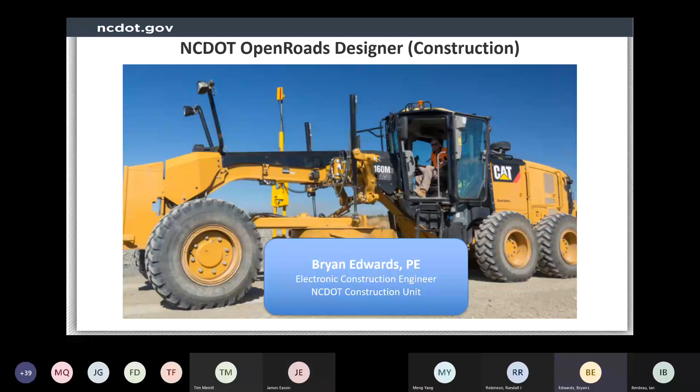Being new to construction, I definitely still feel like I have a lot to learn about construction. But obviously, as we're talking about ORD and how that's going to impact construction, there's definitely a lot... I guess there's a lot of potential. Let me get my slides to advance here. There's a lot of potential.

To be honest with you, I feel like there's probably more questions than answers at this point in the game. I'm thinking back to my time with CAD, and even up till now, we've been talking about ORD and wrestling with it for years on the design side. I don't know if it's going to be all that long on construction, but it's definitely going to be a long process. I don't think we know all the answers, or I know we don't know all the answers yet. I think it's just going to take time for a lot of these answers to present themselves more clearly as we move forward. But anyway, that's just a bit of a disclaimer before I jump in here.

We'll talk a little bit about what we do today, or at least how we deal with a 3D model today, just very briefly, and how we anticipate ORD changing this, and what tools we anticipate using. Obviously our field folks are not going to have CAD machines and be able to run OpenRoads Designer, so they're not. So what are they going to use? Well, they all have iPads. So is there going to be an app for them to use? We'll talk a little bit about that.

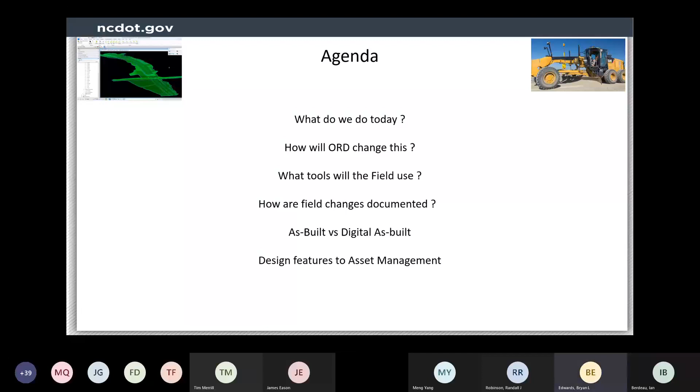So real quickly, what we do today - and I'm sure most everyone's familiar with this - we use the MicroStation tools or software. We produce a 2D set of plans, and we do produce some 3D TIN files that represent this grading model. We do that, at least for larger projects. But we don't certify that; it's just kind of an extra freebie that goes along and gets passed to construction.

And frankly, because it's not certified, the contractors don't use that specifically. They will build their own model from the files that are certified, the 2D files. So that gets passed over to construction - the 2D sets of plans and this design model.

That's really just TIN files, proposed TIN files. What's in construction is just PDF files that our folks are dealing with. We will mark up those PDFs at some point as the project gets built, to note any corrections, revisions, or changes to the plan. We'll mark that up in a PDF, typically using Bluebeam or maybe Adobe Pro, and that's basically it.

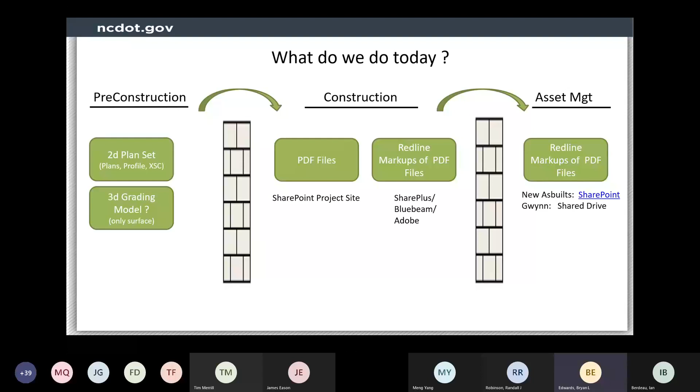Again, I mentioned that we provide these proposed TIN files today, but they're not certified, so it's up to the contractor. If they want to use AMG - automated machine guidance - they're going to build the model themselves from the 2D certified plans, and they're welcome to do that. We have a spec that controls how they can build based upon their model. They have to submit this model to us, to construction, and then we vet or verify it.

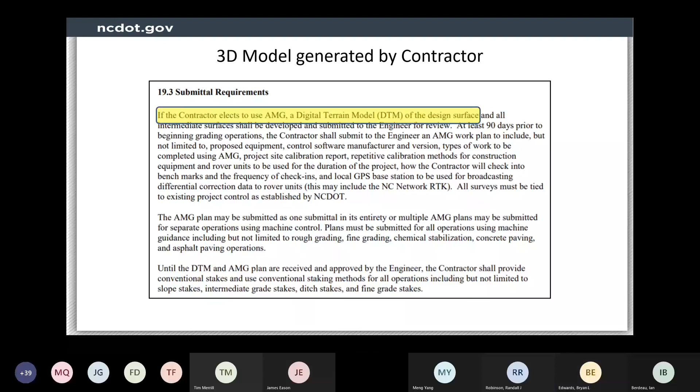Next slide. So, verifying the model - how do we know? Again, we have the design, which is mostly 2D with some 3D, and then we have this contractor model, which is 3D. How do we know that it's right, that it matches perfectly or reasonably perfectly with the design intent? That's what we have to determine.

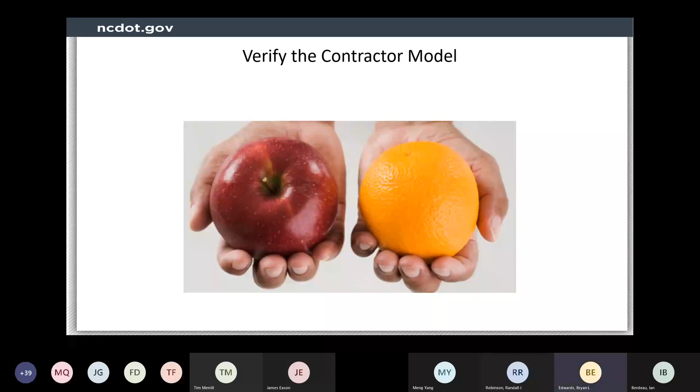In the process we have - I think this was developed by Location several years back - basically what we have to do is start with our design model and bring that forward into this tool called Trimble Business Center. Trimble Business Center is a Trimble tool that has some good ways to compare surfaces, and that's really the main thing we're doing with this.

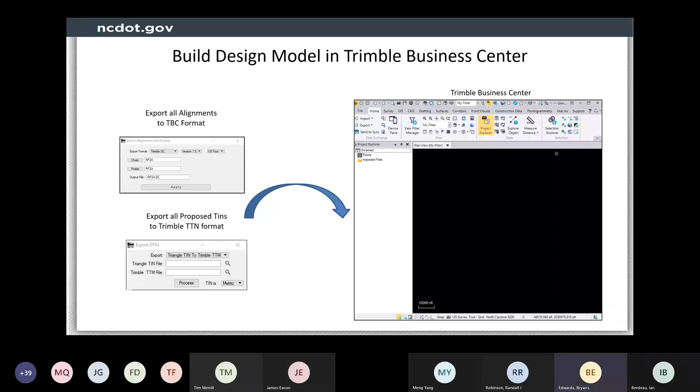We're bringing the alignments in, we're bringing the TIN files in over into Trimble Business Center, and ultimately we end up with this model. This is a relatively quick process because it's all built already - we just have to convert it over into the Trimble format.

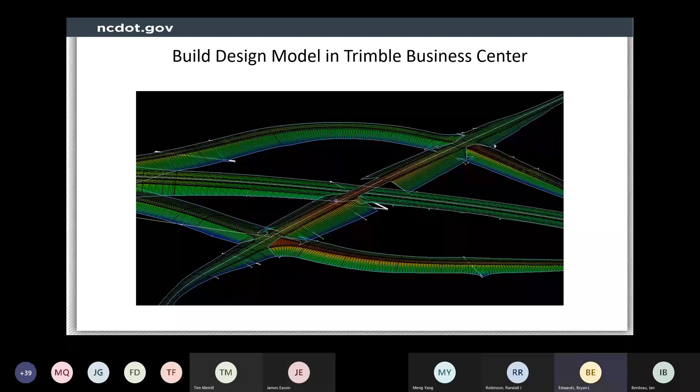So what's shown here basically represents the design model, and then what we would do would bring in the contractor model. So now we have both models in the same software, and we can compare the different surfaces. This just kind of represents what I just described - we've got two models, two surfaces in here.

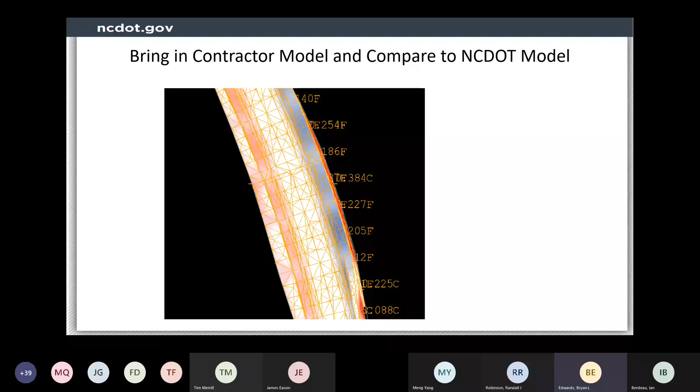Trimble has some really neat tools where we can just evaluate the surfaces. What I'm showing here is like a color shading map that compares the two surfaces - it will generate this color shading map, and we can set the parameters for the colors.

Anyway, we've got it set up so if anything that's white is a very, very close match, and we would say, hey, it matches perfectly. Anything that's blue or red would be higher or lower. One surface would be higher or lower. But this just illustrates the differences.

And then when we have that, we can begin to investigate and see, okay, why is the contractor model different in this area from the design? Is the design model wrong? So again, it just highlights areas where we need to focus, so that we can have some assurance that the contractor model is good or not good.

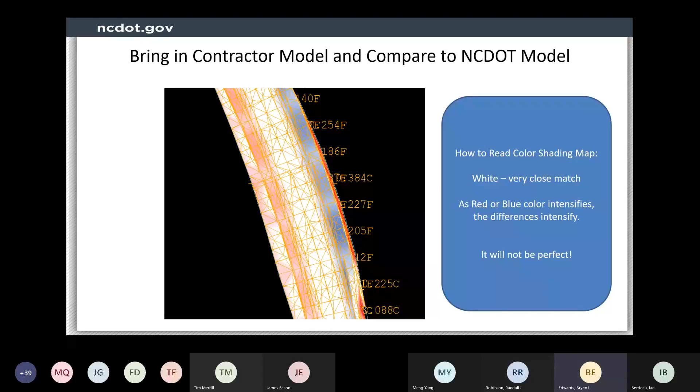I know that's kind of a subjective word there, but anyway, this process I think has worked pretty good, and we do know that it is not going to be a perfect match. There's just not, and that doesn't mean the contractor model is bad or wrong. Just means that these are areas we need to look at. Can we live with the differences?

And that's kind of the approach that we're taking. So anyway, that's what we'll do today. How is ORD going to change this? And this is, again, as we begin to look forward.

So as we talked a little bit about, the design model today is not really certified. So I mean, we provide it, but ultimately, with ORD, at some point, we anticipate that model is going to be something that we can stand behind as an organization and say, hey, this is good. We are certifying this as good, and you can build it according to this. And so we anticipate that happening.

I mean, again, I think there's a lot of questions as to how that works and how we're going to do that, how we're going to seal the model. I don't know how that's going to happen. I know a lot of other agencies have taken some approaches on this that maybe might work for our state. I suspect that the Board of Engineers is going to have to be involved with this conversation as we move forward.

So again, presuming that the model is certified, and the contractor builds from that model, that's at least the hope. My guess is that'll probably be a long transition period where they're still going to build their own model, until they begin to have confidence in our model.

Okay, and then the questions about how do we inspect based upon a model versus a 2D set of plans. So again, there's still questions that we have. We don't even know exactly. Well, I think we know the tool that we're going to be using, and I'll talk about that in just a second. But let's see what's next here.

I guess continuing this conversation, or continuing the thought here. I mean, when I say model, what does that mean? Okay, what file format is that? Is it a DGN file? Is it an iModel, which is again a term that if you've been around Bentley over the last couple of years, you probably have heard this term before. Is it an XML file?

I know in the past Bentley has had the MicroStation or Geopak has had the ability to generate an XML file of a surface, and that's something that could be delivered, a way to deliver a surface to someone. So these are still some questions.

I mean, my thinking, my understanding is that I think it's going to be an iModel, which an iModel, again, unless it's changed recently, is just a DGN file, but it's kind of a compressed, wrapped up DGN file that has pretty much all the design intelligence that's kind of wrapped up and stamped onto the features that are in the model there. So anyway, that's kind of my thinking, but again, I don't know for sure what the answer is.

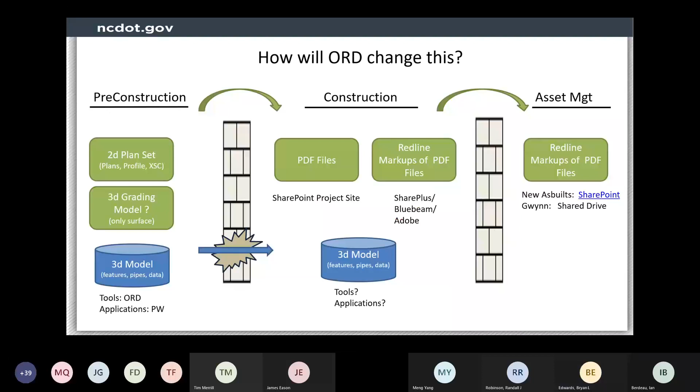Okay. We'll touch on the tools in just a moment here.

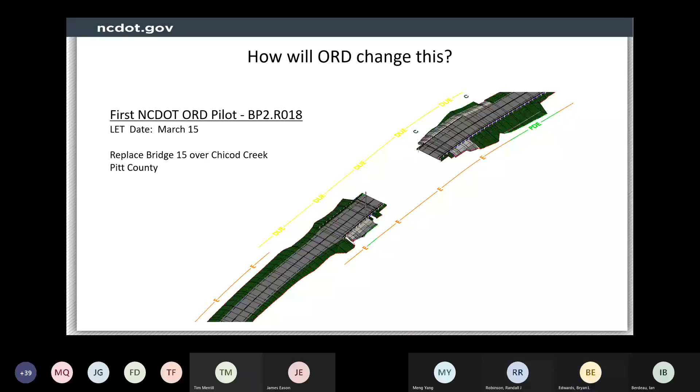Okay, so what tools now will we use, or do we anticipate using? Bentley Synchro is the tool that we think we're going to use. It's basically designed to be able to... there's like 5 different modules of Bentley Synchro. We don't really anticipate using any module other than maybe the field module, although it's hard to know.

But basically, this should allow the inspectors to open up the model, see where they're at in the field in relation to where the construction activities are, and what's supposed to be built here, and at what station. They should be able to touch on a pipe and find out whatever information they need, whether it's the pipe size, the type, or maybe even the slope or elevations. They should be able to have all of that really at their fingertips.

The thing with this tool, Synchro, is that we don't even have access to it. So we've not had a chance to play with it and get familiar with it and understand its capabilities and functions. We've seen demos on it, at least I have, and I do think it's made a lot of progress. It's come a long way from the very first time I saw a demo of it. But to me, there's still a lot of questions that I have without having this tool available for us to play with and get our hands dirty with.

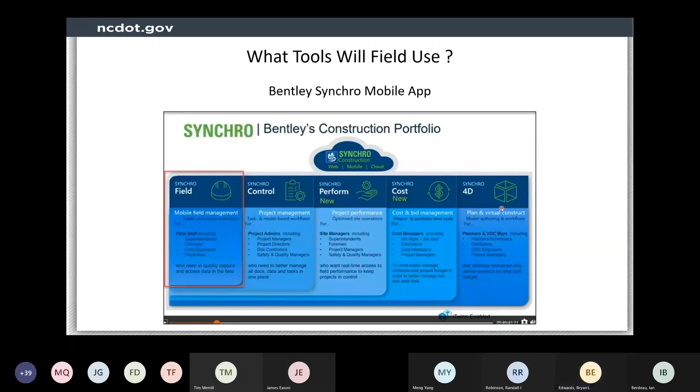So anyway, we anticipate it runs on the iPad, and again, we anticipate this being how our staff are going to interact with a model. I think I just threw another picture here of that.

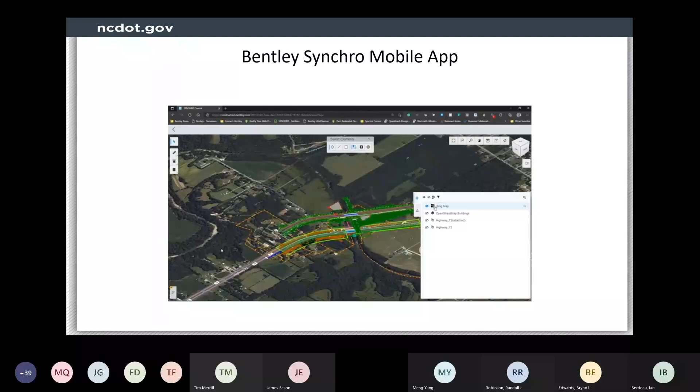Okay, so continuing the thought on Synchro, the only thing I put in here that's different with this slide, and it doesn't really stand out much, is: how are field changes documented in the model? Remember in the past we would do our as-built by marking up a plan sheet. Well, assuming we don't have a plan sheet, what do we mark up? How do we illustrate and document changes like field changes? Presumably, it's got to be in this model.

And remember, our folks aren't going to have CAD machines and OpenRoads Designer so that they could open it up and shift a pipe 5 feet or 10 feet or whatever. So again, presumably this tool Synchro is what they're going to use, but until we see it and can play with it, it's kind of hard to fully understand how this is going to work.

So all right, this takes me to the as-built, the digital as-built.

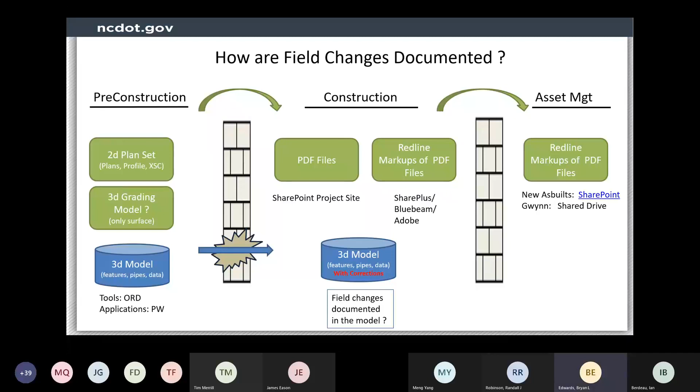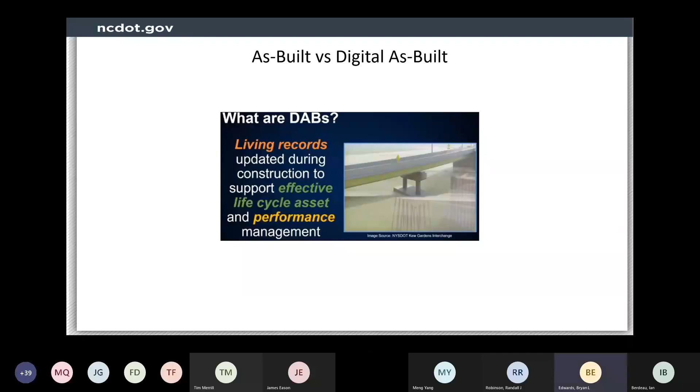So if we go back to the slide just a moment, and again the 3D model there, if we're going to update that 3D model and tweak it, that basically is a digital model, a digital as-built. I copied this definition from an FHWA presentation on digital as-built, but I liked it. It's a living record updated during construction to support effective life cycle asset and performance management. I think I've got another slide here that also illustrates the difference between an as-built versus a digital as-built.

The traditional as-built is just a 2D PDF that has some red line type markups on it. The digital as-built would be 3D, and more than just 3D, it would have all the metadata or the data, the attribution of the features would still be part of it, right?

And so ultimately, as I mentioned earlier, this information needs to make its way over into the GIS world or to our asset management repository so that they can do their thing with it. So anyway, that's a digital as-built, and we're still trying to figure out how that's going to work, what it's going to look like for North Carolina.

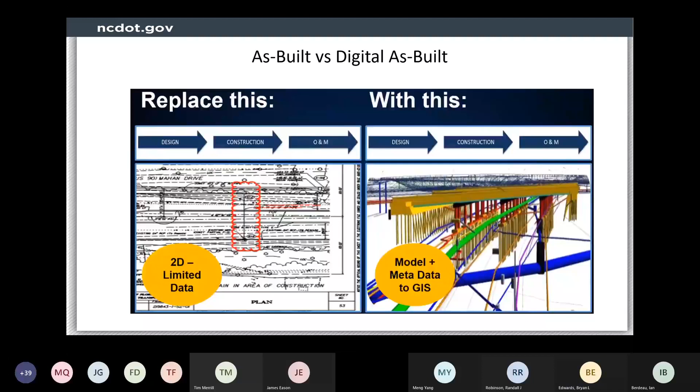This little slide here is just to illustrate that this model does ultimately need to make its way over to asset management. The thing that makes this a little tricky, and I touched on it earlier, is there's a different set of software that asset management deals with. We've proven that we can bring DGN files, even OpenRoads Designer files, over into GIS. We can bring the attributes over there too. So it's definitely doable, and that's the path that we see moving forward here.

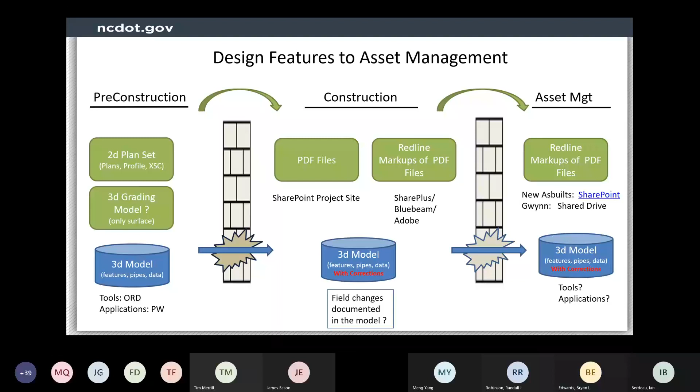This slide here just continues the thought. We anticipate having some preset attributes on the design side of things that will ultimately make its way over to asset management.

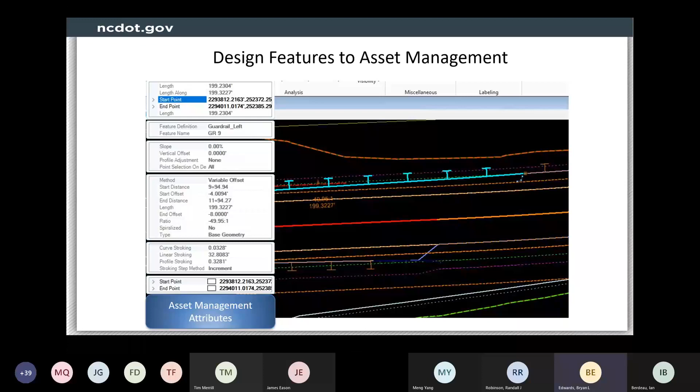Maybe a better illustration - I'll touch on this here. We have MicroStation attributes, and they follow that feature all the way over to GIS. Then there's civil attributes, which represent the design attributes. For example, if you're stationing there, but if you had pipes, there would be a lot more civil attributes there. All that intelligence, we likely want that to move forward with this feature as it moves forward.

But there's another area of attribution. This may not necessarily be a new thing, but it's another area where we envision being able to just add information to certain features that's going to be helpful, particularly for asset management.

If we can go ahead and get those attributes or fields pre-set up, so that anytime this particular feature is placed, these fields are already prepped and ready. Then as the intelligence moves along into the model and ultimately over to asset management, the information really, or most of it, is already there. They don't have to come along after the fact and collect this information. Hopefully most of it's already there - at least that's the idea.

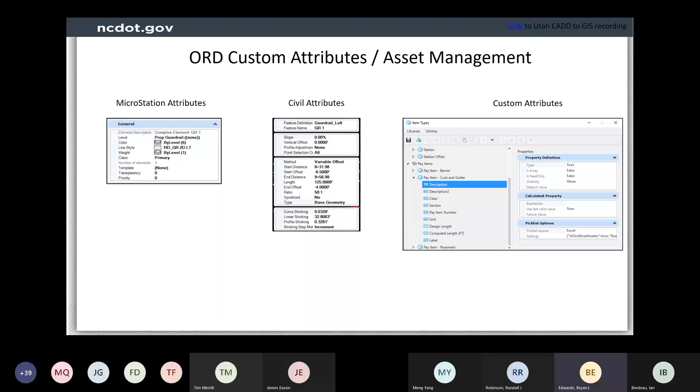What we're trying to do is pre-populate or pre-set up some attributes on pipes, and then as this project makes its way through the construction phase, maybe the inspector in the field can confirm okay, this was a concrete pipe, this was the pipe size, this is the pipe length, and all the other pieces of information there. So it's documented in the field, and once this file makes its way over the wall, so to speak, to asset management, the information is already there, and asset management doesn't have to go back out after it's been constructed to collect and confirm the information. So again, this is an approach, what we're thinking - we'll see how it works out, I guess.

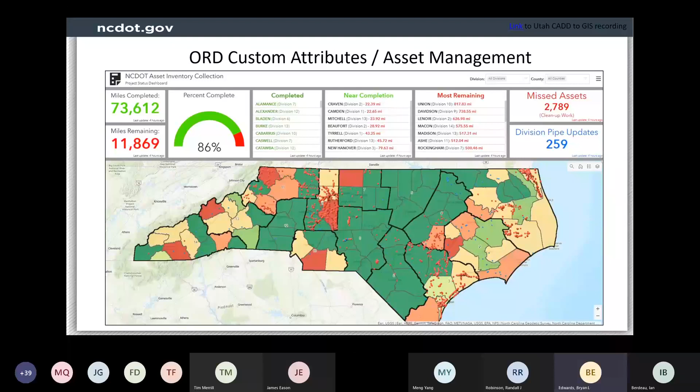I'll be happy to take any questions if anyone has any. Bryan, are you able to see the chat, or I can read it out to you if you like? Okay, let me see here. I'm happy to read it to you.

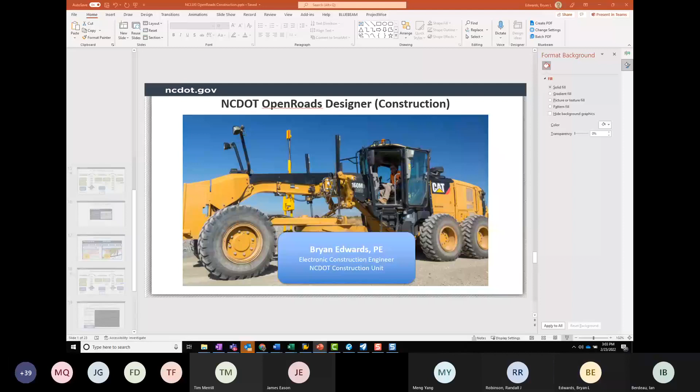I'll move this over here. This was the one project that I took a screen capture from. I did want to show that, it looks kind of neat here. Okay, let me pull up the...

I'm looking at a question from Craig here. Remember, even in V8 roadway could generate a proposed DTM, assume ORD has the same capability. Is it just a matter of deciding on the 3D deliverable for contractors to use for constructing a project, or is there more to the decision? That's a great question.

I don't know, I guess right now my sense is that... let's see here. Well, I guess I don't know enough to answer that question just yet. You're right, we definitely had the ability to deliver a DTM, and I think there was the ability to do an XML file, and I'm sure all that's still there in ORD.